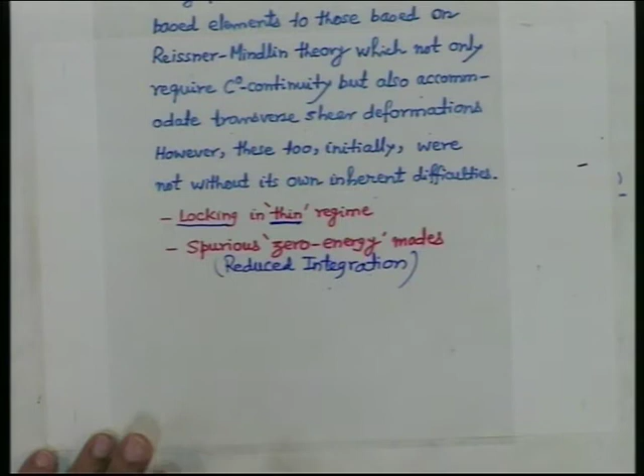I was discussing with you the concepts of locking and spurious modes, philosophically, meaning without giving details. What I was telling you is that if you use a shear deformation theory like the Reissner-Mindlin plate theory, which includes shear deformation, the theory is good for finite element because the formulation becomes C0 continuous. Shape functions are easily derived, simple formulation, plus it also includes shear energy. So it can also be used for thick plates, laminated plates, and so on.

So there are advantages, but when the thickness of the plate, beam, or shell becomes thin, same formulation, only one dimension becomes thin, then what you encounter is a phenomena called locking. What is locking is that the displacements you obtain become very, very small. Very small means not half or a quarter or a tenth, but 1000, 10,000 times less, with the same formulation. So people gave this phenomena the term locking, that your displacements are getting locked. Becoming very small means the flexibility of the plate is simply not there. It is displacement, no displacement.

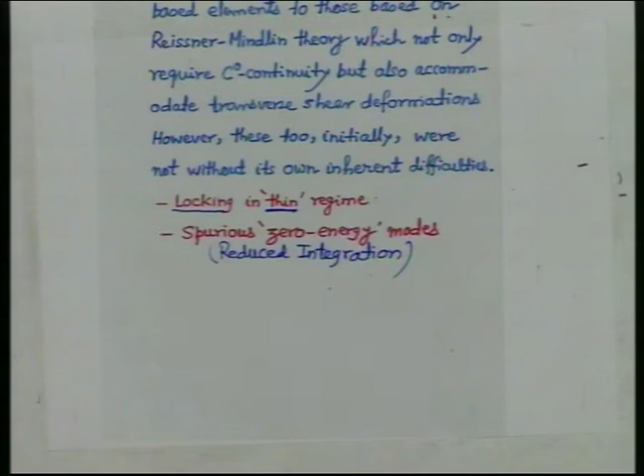So then people said, and it occurred accidentally - this solution that I am telling you, numerical integration - if you were to integrate that integral by a formula which required 3-point integration, then the solution showed locking phenomena. But if you do not integrate by 3-point, but instead integrate by a 2-point formula, which is not correct, which is incorrect, then people found accidentally that the displacement obtained was reasonable.

So they gave the name to this method 'reduced integration method', reduced integration technique. It is a trick, it is not a method. So I will say only technique, and it was not developed, it just occurred accidentally. I will tell you the history, how it occurred.

Okay, so reduced integration started being used for thin plates. Once you have a thin plate, thin shell, thin beam, people started using reduced integration in order to get a reasonable solution. Then they found that sometimes...

...in a particular boundary condition problem - boundary condition means some peculiar boundary. Suppose you have a plate supported only - you must have seen in some parks, there are roofs with only 4 columns, 4 corner supports, a plate supported only on 4 corners, no beam, just a slab. It is a very light structure, only to cover you from shade. So something will be there and there will be 4 columns. Now, after all this, it will deflect.

Then people found what is causing that problem: you are getting more than the necessary zero eigenvalues in the element. By doing reduced integration, what happens is the number of zero eigenvalues increases.

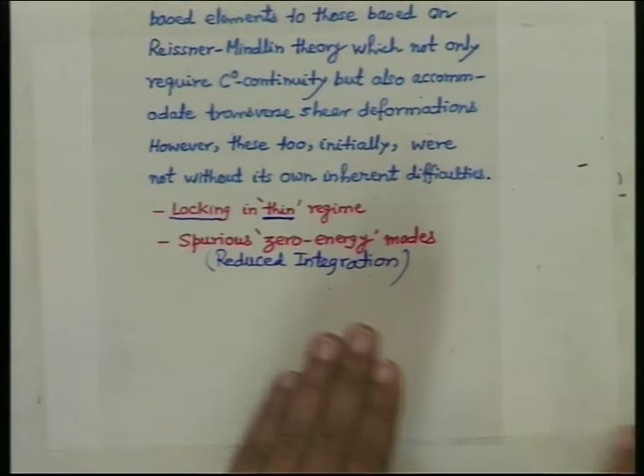The diagnosis was that it is occurring because of extra zero eigenvalues. Zero eigenvalues represent rigid body modes, rigid body motion of the element, because once anything deforms, first it is rigid body motion, then only deformation follows. So rigid body mode has to be there anyway, meaning extra rigid bodies were occurring.

That was found to be the cause for why you were not getting a solution in some particular boundary condition. Anyway, a solution has been obtained even for this, but these are all tricks, not straightforward solution procedures.

So there are many things that finite element methods need. These are the developments that have taken place from 1975 onwards. The first 10 to 12 years was the basic methodology, everything very sound. People started using the method and thought they had solved all the problems, but it is not so. The more you try to improve, the more problems you come across.

So there are two problems that you face with shear deformation theory: one is locking, the other is extra zero energy modes.

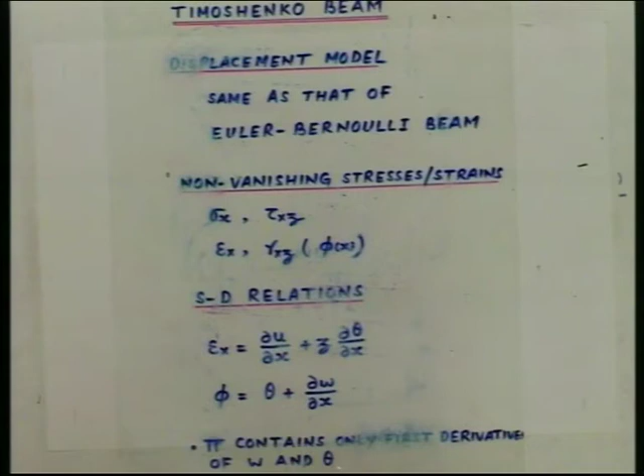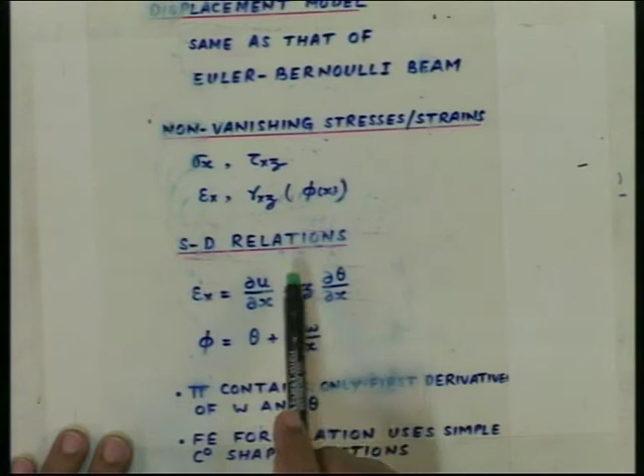I will explain this with reference to Timoshenko beam theory. Timoshenko beam theory is similar to, but the next level beyond, Euler-Bernoulli beam theory, as it includes shear energy. The displacement model is the same as Euler-Bernoulli, and here the non-vanishing stresses and strains are given. Your strain relation, epsilon x, will be this, and the shear strain, gamma xz, which I write as equal to phi, will be given by this.

You should note that these two, the extensional strain and the shear strain, will enter into the expression for your energy, pi. Pi is the strain energy, the total potential energy, and that consists of strain energy. So pi contains this as well.

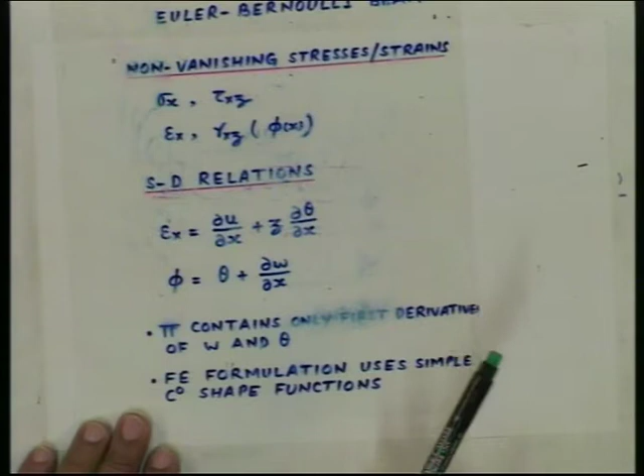A C0 formulation will always have the expression for pi containing only the first derivative of the basic dependent variable, not the second derivative. You will find that the energy expression for Kirchhoff plate, Euler-Bernoulli beam, and Love's theory contains the second derivative. But the theory which contains shear energy will contain only the first derivative. The finite element formulation this requires is only C0.

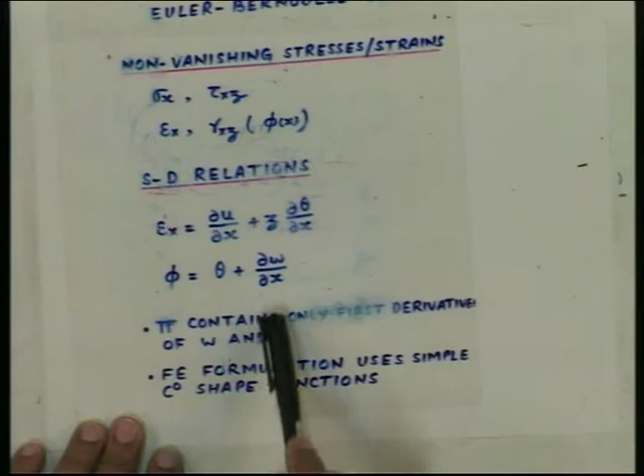So this is another way of looking at it: if your energy expression has only the first derivative of the dependent variable, your formulation will be C0. If the energy expression has the second derivative, what does that mean? In the integral you have a second derivative, so you have to evaluate it. If you have to evaluate the second derivative, one derivative less than the highest derivative occurring in the expression must be continuous. That is why the first derivative dw by dx should be continuous, not just w itself, but also its derivative.

It is always the case that the continuity requirement for integrating a function's second derivative is that up to the first derivative, the function must be continuous. That is why C1 continuity comes in.

What happens in Euler-Bernoulli beam theory is that this transverse shear strain, the same expression I had written, phi equal to theta plus dw by dx, is set equal to zero. If you set this equal to zero, you get theta equal to minus dw by dx, and this causes the occurrence of a second derivative in the potential energy functional pi.

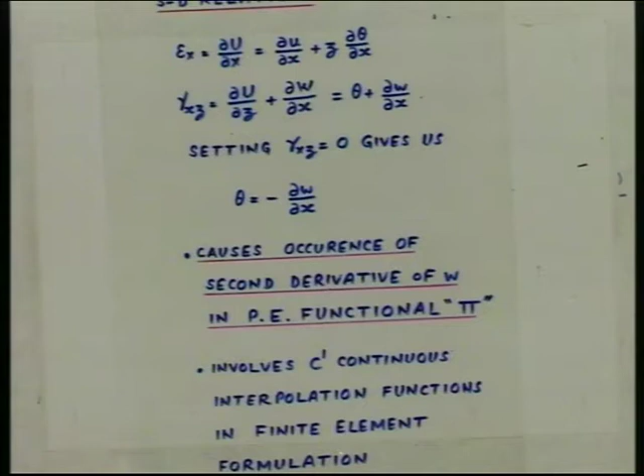What gives you the second derivative in the energy expression is this: you express everything in terms of only w, and w becomes a second derivative. The moment you see any second derivative in an energy expression, you should recognize you will need to use a C1 continuous finite element, meaning continuity of displacement. That means you need continuity of not only w but also its derivative, both must be degrees of freedom. Then only can you have continuity, and such formulation involves a C1 continuous interpolation function in the finite element. I am emphasizing the same thing in different ways.

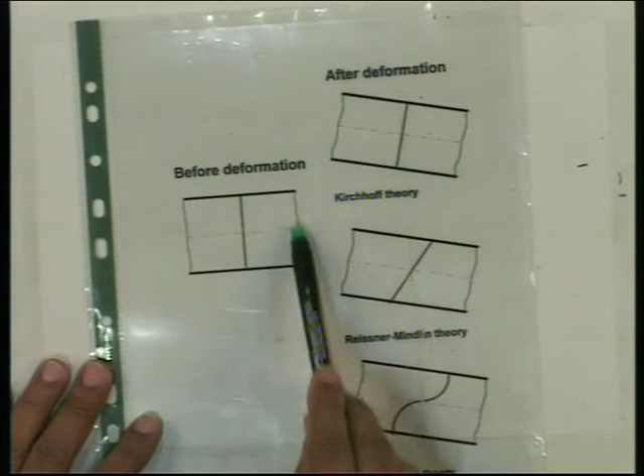What I have been telling you so far is this, in a nutshell, with a simple diagram. If this is the thickness of a beam, a plate or a shell, I have taken a small element. This vertical line is the normal, the transverse normal, and this dotted line is the mid surface, mid line, or neutral axis. There should not be any confusion after seeing this diagram.

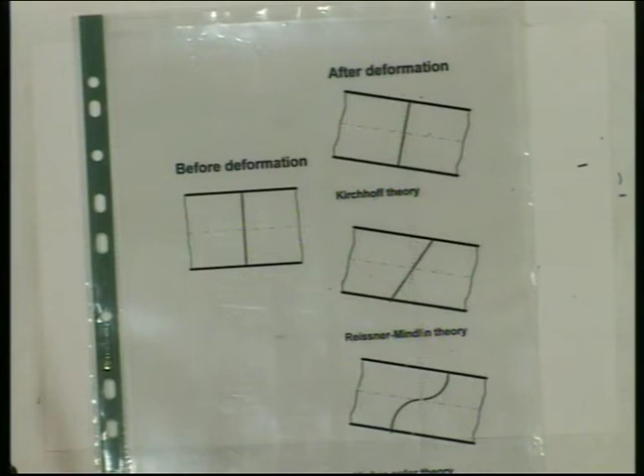This small element after deformation will get deflected, so we have to show this small deflection. It is small deflection, it will not change so much that every angle is different. In Kirchhoff theory, if this line is the neutral axis, after deformation this normal will become like this, and the 90 degree angle between this line and the thickness line will be maintained.

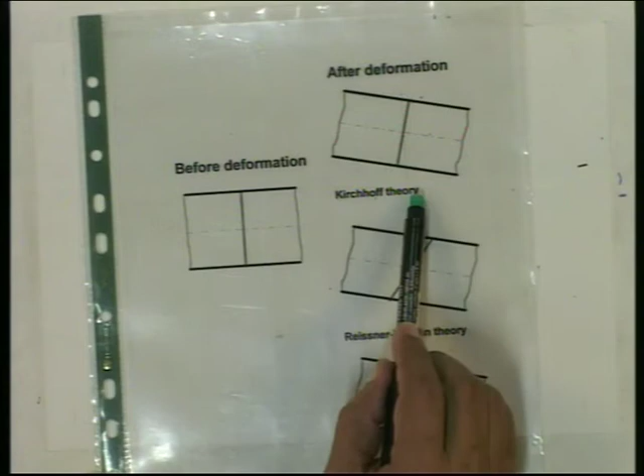That is the Kirchhoff theory, applicable to Euler-Bernoulli beam theory, Kirchhoff plate theory, Poisson-Kirchhoff plate theory, and Love shell theory. This one is exactly the same, no difference.

Now, when you include shear, we are saying that this normal remains straight, but not necessarily normal anymore. So it takes a shape like this, and this shape means you have an additional angle that you are seeing here.

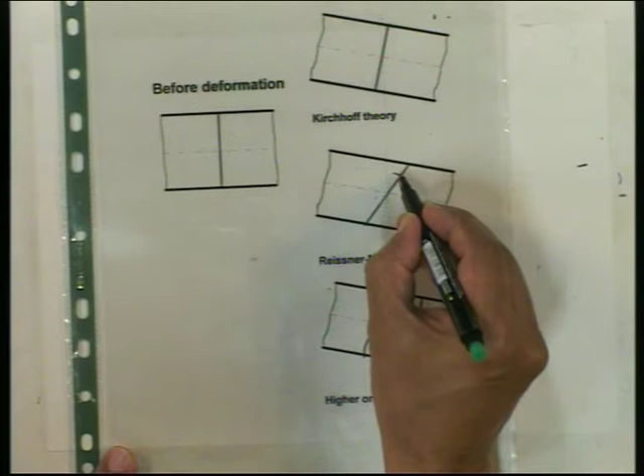What is that additional angle? It is this, because this is the normal, this dotted line, and the additional angle is this, by which the normal rotates. This angle is the shear angle, gamma xz.

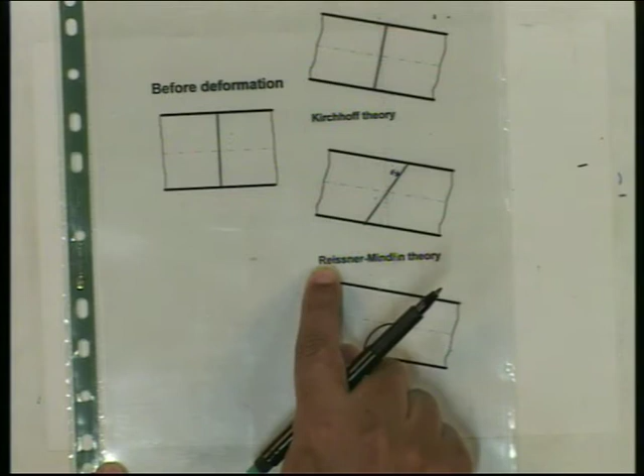Gamma xz is constant throughout the thickness, same, because it is a straight line so it cannot change. It should actually change, but it is not happening in this theory. That is called Timoshenko theory for the beam, Reissner-Mindlin for the plate, and Naghdi for the shell. Exactly similar formulation has been done for all three: Timoshenko for the beam, Reissner-Mindlin for the plate, and Naghdi for the shell.

Then you come to this: we assume that after deformation the normal does not remain straight, but becomes curved. It takes a cubic curve. So deformation of the normal is there, and such a theory which includes deformation of the normal is also called warping of the cross section.

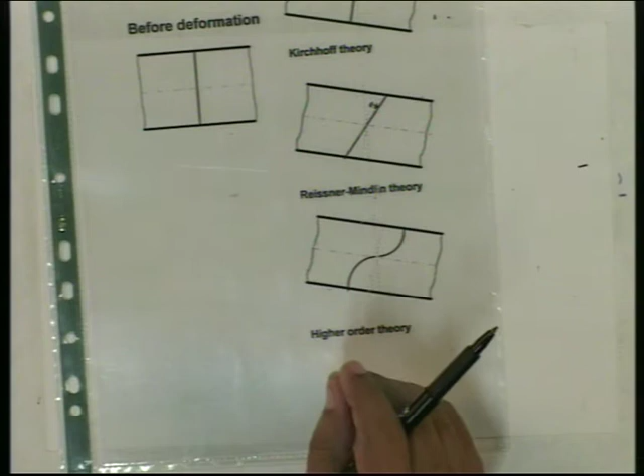Warping, if you have heard the term, what is warped? The cross section gets warped, meaning the cross section of a beam, plate or shell comes out of plane, becomes something like this, it goes out, goes in, out and in. That phenomenon is called warping.

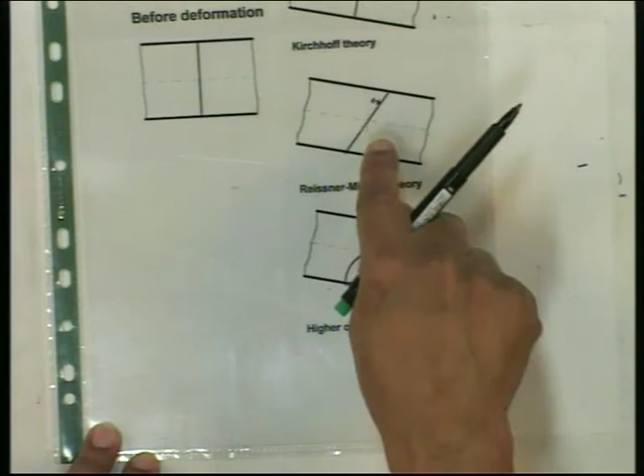But if you take a single line, it will be like this, the normal. Such formulations are higher order, meaning you are taking additional terms which I had explained to you in the plate theory. Nowadays we use this to a great extent for composites, higher order models, because the simpler theories are not enough, they are useless for sandwiches and composites. We have to use something like this minimum.

This diagram all of you must practice and see. This is for a plate. Very clearly I have shown the state of stress that exists in a plate. I think I must have drawn this in class also, for those who took the plate and shell course, but there I was using the blackboard, so I was looking for this diagram which I had made long time back.

It was there in this file, but there are so many files, so it is difficult to search which file, which paper is there, that itself is a big job, you know.

This is at a distance, this line is the mid surface, solid plus two dots, like any center line we draw. This is the mid surface, and the hatched line you are seeing is at a distance z and of thickness dz. So what is the stress acting at a point on this?

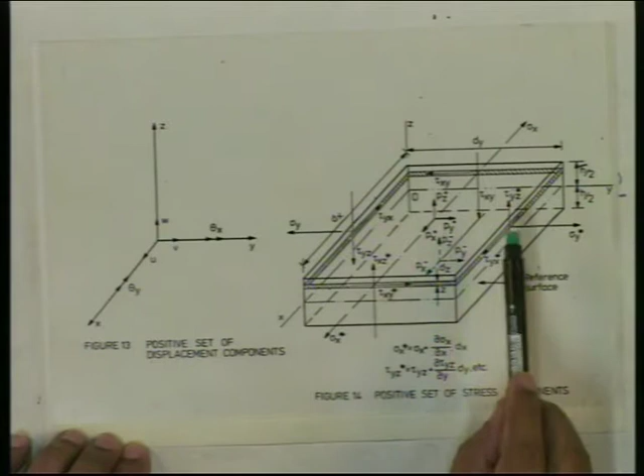You make a small parallelepiped, a 3-dimensional element, and show the stresses on the positive and negative planes. For example, this is my positive x plane, so there will be sigma x, tau xy and tau xz at this point. Similarly, this is my positive y plane, so sigma y, tau yx and tau yz.

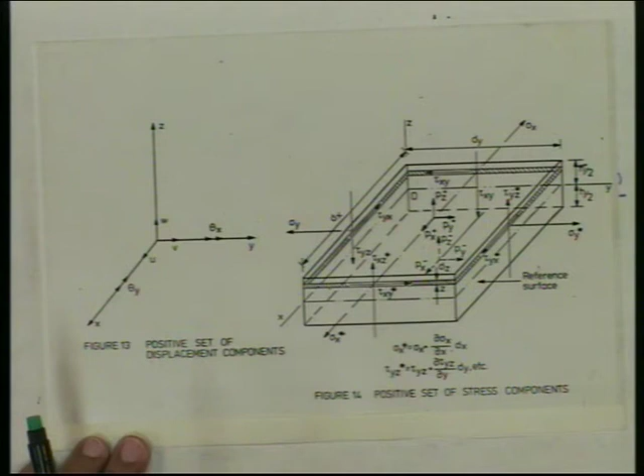Is it okay? Why have I put a star here on this negative plane? I have tried to show that if this element is of finite size, there will be change from here to here. That change means increment, and increment is derivative. Similarly, here there will also be some increment.

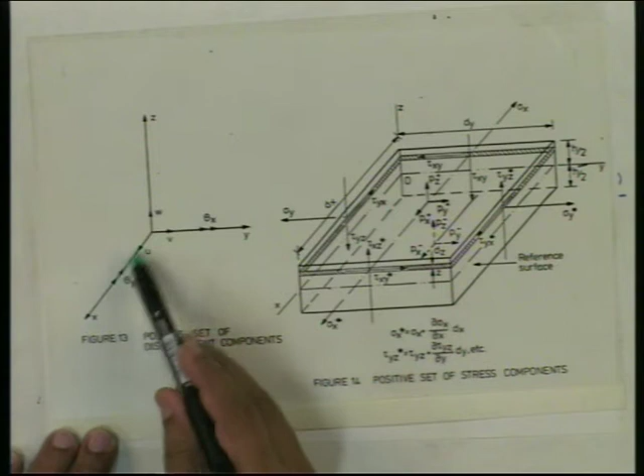So this diagram you should know. You should also know what are your positive directions, positive displacements and positive rotations. These are our positive rotations. Theta y is going inwards along the x direction, theta x is going along the y direction in the positive sense. Then the load is acting on the top surface: Px plus, Py plus, Pz plus.

So like this we have the element of a simple plate. You should know this, but plate theory is a 2-dimensional theory.

So what we do is integrate all these stresses and put the effect of these integrated stresses on the mid surface. In a plate theory, a shell theory, or a beam theory, we do not consider the thickness. This must set in your mind fully. I find even in conferences and meetings, even senior people do not have this concept. They do not understand that a beam means a line.

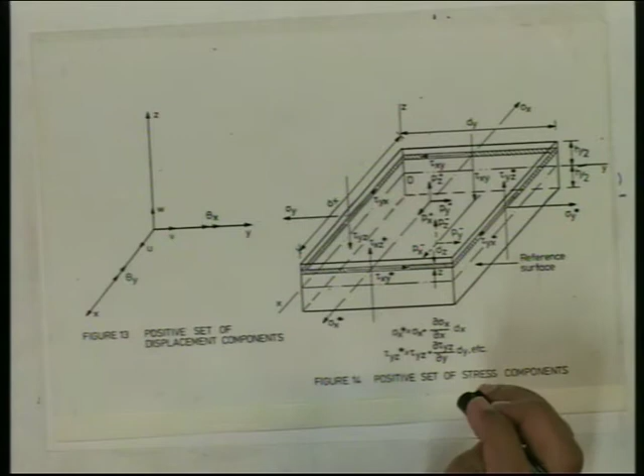We do not have to worry about the thickness of the beam, not h, the depth. In beam theory, it is a one-dimensional theory, so we are studying the behavior of a single line. In plate theory, we are studying the behavior of only the mid surface. In shell theory, again it will be a curved mid surface.

So the mid surface, after you have integrated these stresses, you will get something like this. Although I have shown the thickness here, the effect of these stresses has been put only on the mid surface. These are all integrated values of stresses. Integral of sigma x dz is Nx.

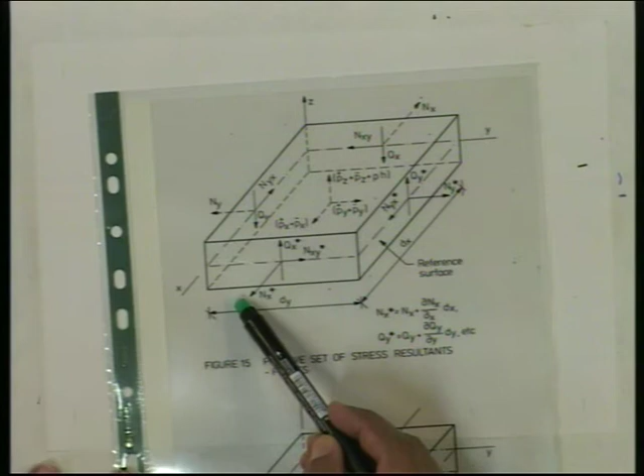Integral of sigma x dz is Nx. Qy, the integral of tau yz dz from here to here, is Qy. It is like this, and they are all put only on the mid surface. These are all integrated values, so any plate theory will include only these forces.

Similarly, you also get moments. So moments will also act on the mid plane in a plate theory. I have shown here the positive moments, and here the positive forces. So this also, please practice.

Now, how do you start the formulation? First of all, you must have some theoretical background about plate theory. You cannot study plate finite elements without knowing plate theory. So read some book for the basic idea about plate theory, the first chapter.

So in a plate, what happens? Kinematics, as you know, means deformation. What is the kinematic relation? Now, those of you who have been following my other lectures, I have made a slight change for a simple reason. The displacement within the plate at any point P is given by u, v, w, which are functions of x, y, z.

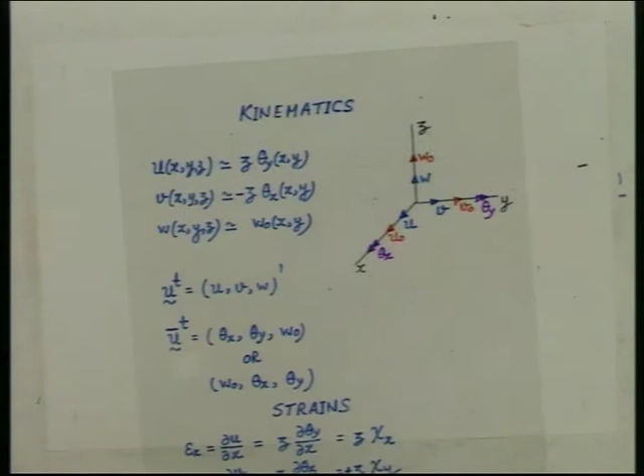It is just like this, you see. So the displacement at any point P is given by u, v, w.

U v w, u at any point inside the plate. This is not a blackboard.

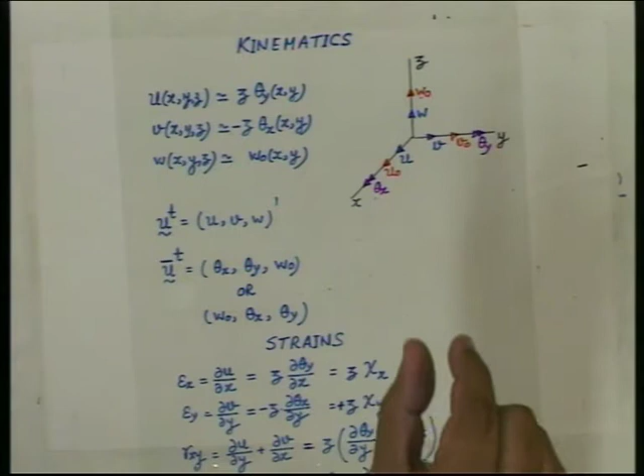At any point P inside the plate, u v w can be written as u transpose, since u vector is normally written vertically as a column u, v, w. To make it a row, I put a transpose here, just to save space, nothing else. Otherwise it would take 3 lines, now it takes only 1 line. So it is a concise way of writing, nothing else.

Similarly, the displacement of P naught, U bar, is the displacement of P naught. What is P naught? What is the difference between P and P naught? P naught is on the mid surface. P naught corresponds to where the normal cuts the middle surface.

Displacement of P naught is given by 3 quantities: theta x, theta y, and W naught. Or you write it as W naught, theta x, theta y. I think this one is more convenient, since we always write displacement first, then rotation. Some books write it the other way, but I prefer W naught, theta x, theta y. So displacement of the mid surface can be completely defined by knowing these 3 quantities. If you know these 3 quantities, you can find the displacement of any point within.

So having established this, the next step in finite element is to first establish your displacement field, then find out the strain. There is no finite element so far, this is just the basic theory of plates. Then you find out the strains.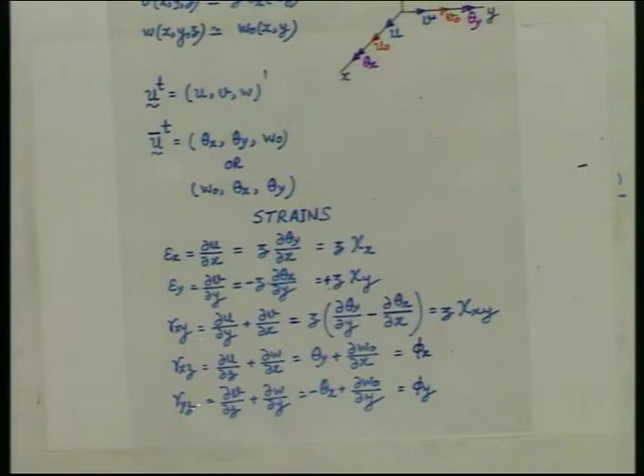Strains are always derivatives of displacement, as in the theory of elasticity, strain displacement relations. There are 6 strain displacement relations, but I have written only 5 here. Why only 5, not 6? Because epsilon z is 0 for a plate, we assume the thickness does not change, so there is no use writing that one. That is why only 5 are written.

So epsilon x, du by dx, will be z times d theta y by dx, and this quantity we call kappa x - curvature, the change in curvature. Initial curvature was 0 for the plate, after deformation it becomes this. So change in curvature is from kappa 0 to this. Rate of change of rotation is curvature, so this is kappa x.

Similarly, epsilon y equals z times kappa y. Then there's the twisting curvature. In-plane shear strain will be z times kappa xy, so this quantity is kappa xy.

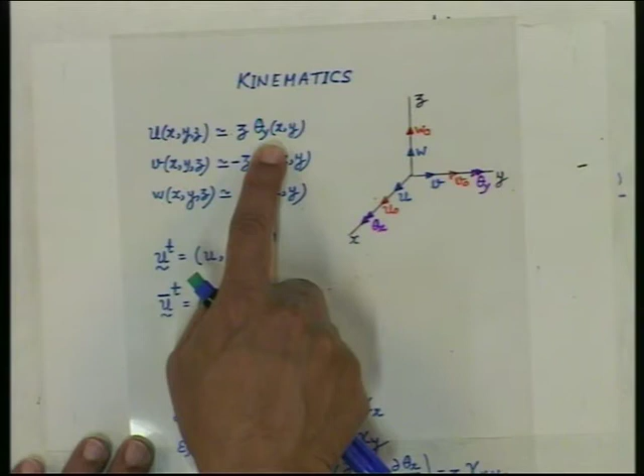Now in the computation, there may be plus minus differences from what you learnt in plate theory, because of a change in sign convention I have made here. Where you'd put theta x, we have theta y, and theta y equals minus theta x. If you make that change, everything else follows. By doing this, I have made all these rotations positive, that's all, nothing else.

So this is one way of looking at it. Then gamma xz is du by dz plus dw by dx, giving this term. Since it is constant, it does not vary with z - it's a constant shear angle.

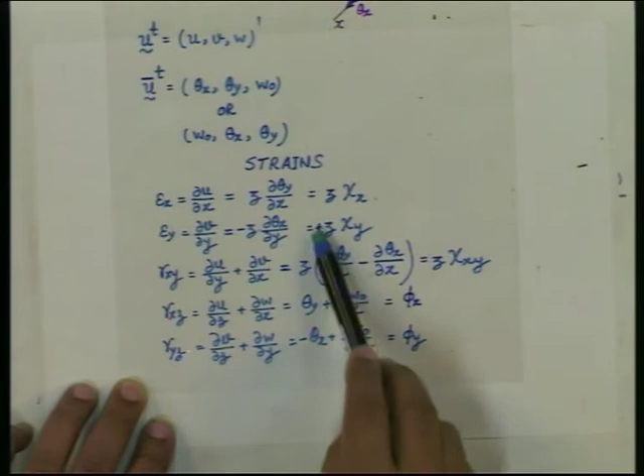Let us call that shear angle phi x. Phi x is the shear angle in the xz plane, phi y is the shear angle in the yz plane. So you have the strain displacement relations: strains at any point P in terms of the curvature of the mid surface and shear angles of the mid surface. This relation follows directly from the displacement field.

Then, yes, then you have to have the expression for mid surface strains. What happened, not coming? Oh, coming, okay, good, I think display is okay.

So this is mid surface strains. What are mid surface strains? There is kappa x, kappa y, kappa xy, and there is phi x and phi y.

So this is how I have just put it: kappa x, kappa y, and kappa xy in one bracket, and this shear in another bracket. I am calling this part B, and this part S.

And there is a bar quantity you must be seeing here, above the strain, strain bar. Strain bar refers to all the quantities that you find.

Some people are simply sleeping. They do not want to relax, what is the use of listening, let us relax.

So, bar quantity refers to mid surface, and quantity without bar means point P. Quantity with bar means we are talking of mid surface, P naught. So all these bar means strains of the mid surface.

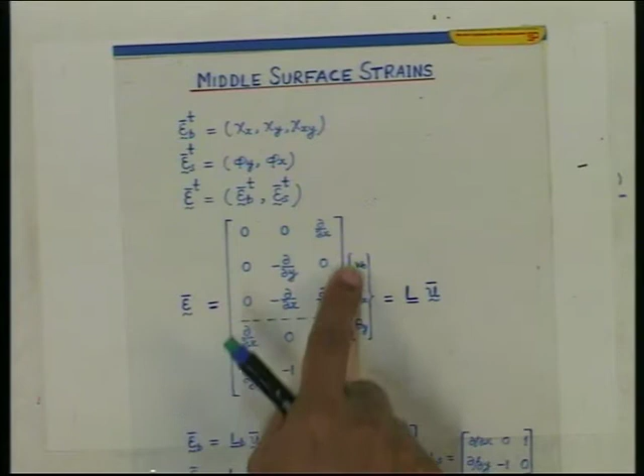And then you simply have to organize your strains. Strain bar can be written in terms of these basic displacements, W naught, theta x, theta y. So there will be L times U bar. What is U? U is U, V, W. And U bar means this. We are calling this vector as U bar.

I think I must have given you this in the earlier one, yes, right in the beginning I made it very clear. U is this and U bar is this, so there should not be any confusion. Mid surface is U bar, because now everything will be only in terms of mid surface in plate theory. So this strain, mid surface strain, is equal to L times U bar.

Now here I have partitioned this matrix. There is some reason. This total L matrix has been partitioned into two parts. There is a reason for it, and it is not given in most books. The reason is most books do not go into details about reduced integration, locking, zero energy mode, and how to develop effective elements. So they just give you the procedure, but that procedure will fail when you have thin regime, when you have a thin plate, it will not work.

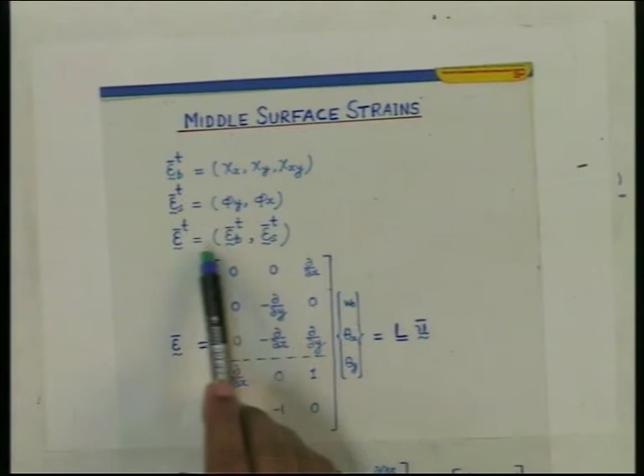So there is a reason for partitioning. This top part I am calling LB, and the bottom part, because of shear, is LS. Here also, total strain consists of epsilon B, three terms, and epsilon S, so there are five quantities in the total strain. So we can also write down the bending strain of mid surface and the shear strain of mid surface as LB times U bar and LS times U bar, where U means U bar. So this expression is good.

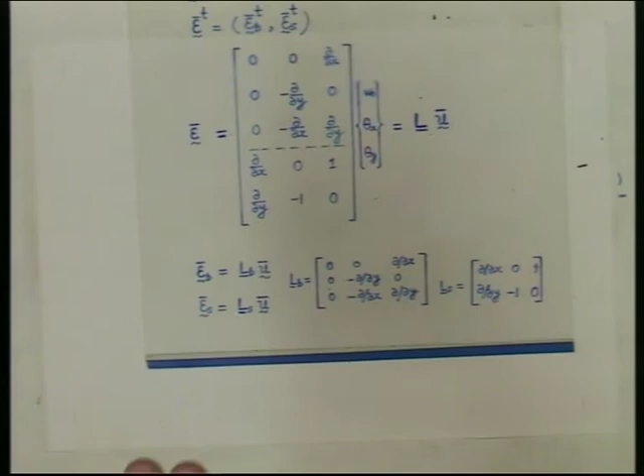And sometimes, see, this is preparation before doing the finite element. We have not talked about the type of element, whether you are using rectangular, quadrilateral, or triangular element. No talk, this is the basic preparation. Every finite element work requires some basic preparation, initial preparation. So that you have to do. So you have to partition this like this.

From Punjab, there is a story attached to this Butalia. He is from Chandigarh, so he did his masters. Now even, I am saying, even in masters he was so motivated. In 18 months, in those days only 6 months of thesis work was there, in 18 months he produced work of a quality worth publishing in a good journal, and he published before leaving this place. Okay, so this is called motivation of a student, you know.

Coming from Punjab, very carefree, you know, people are carefree, not very, we always feel that people from South India and Bengal, they are more motivated. But this man was from Punjab, Chandigarh. So after doing his masters, he applied to some universities for PhD. Of course he took my recommendation, etc, so that is a different matter.

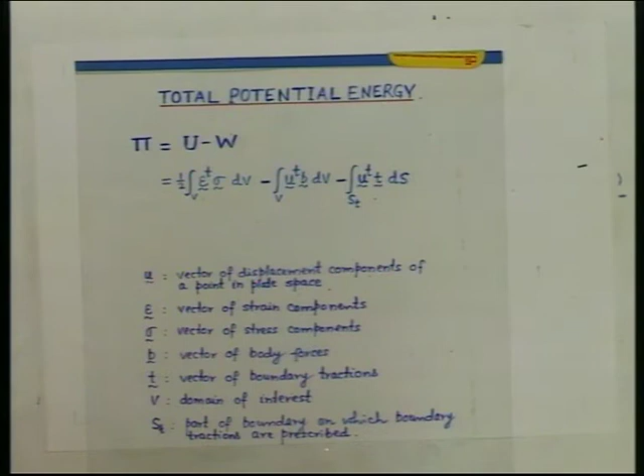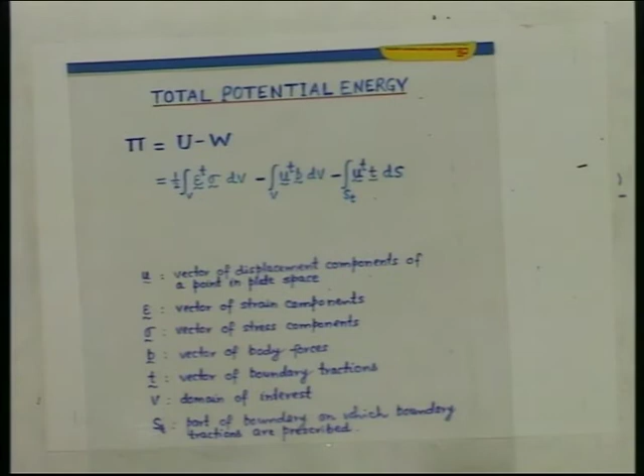Having defined your strains, you find out the potential energy, in the usual manner. This is strain energy minus work done by forces - body forces, traction forces, edge forces. I will not spend time on this, because otherwise time is always at a premium.

This is seminar mode now, seminar mode is flash - you get everything only in a flash. So then you find out the strain energy. There are two types of strain energy, one is flexure, the other is shear. Flexure and shear, we can find out in the usual manner.

Flexure consists of epsilon, sigma x, sigma y, tau xy, and the corresponding strains, and you can get this strain energy in terms of the mid surface strain and mid surface forces. So this is the final expression.

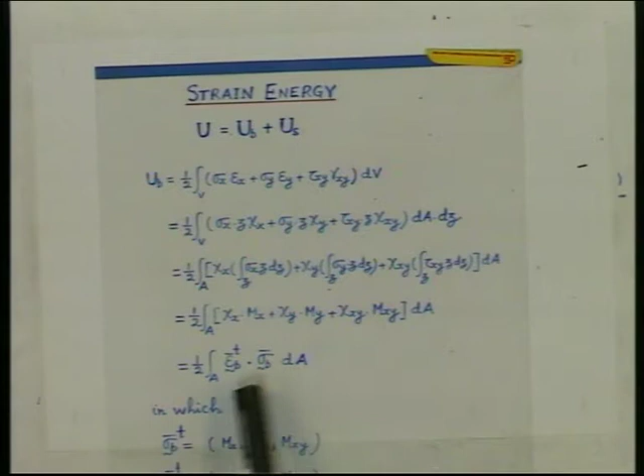Incidentally, this is recorded, so it will be available to you, this video - that is one good thing about video.

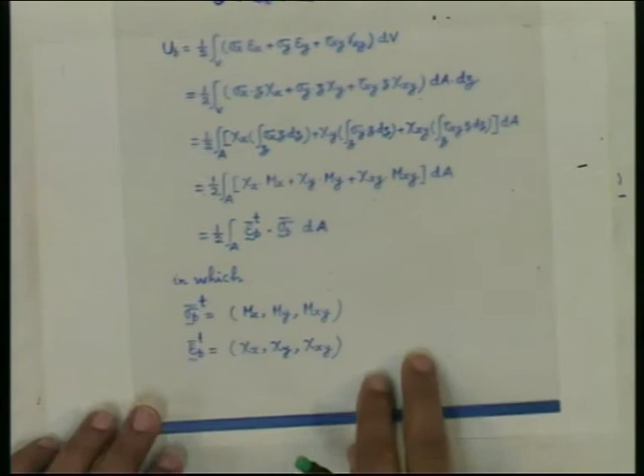And here I have written very clearly that epsilon b is this, and these three kappas, and sigma b bar is this: mx, my, mxy. So this is bending, meaning bending I am separating from shear. I am splitting the total strain energy into bending and shear, there is a reason for it.

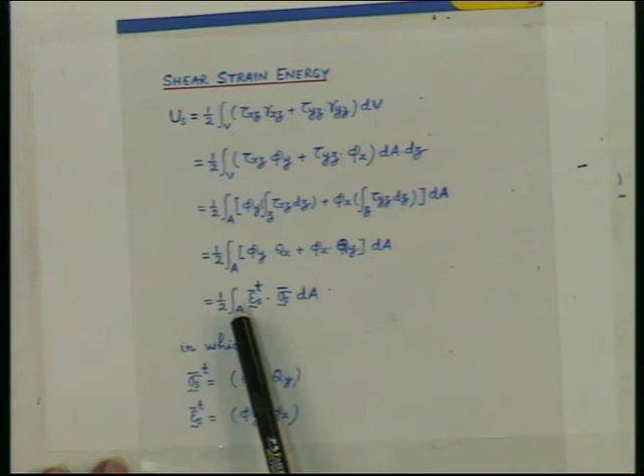Then I can find out the shear strain energy, second part, US. US consists of tau xz doing work on gamma xz, tau yz doing work on gamma yz, and if you fill up all the quantities, you get the two-dimensional expression. This is in area - you start with volume and come here over area. Last expression only is in area, area meaning mid surface area. So it is epsilon s and sigma s bar, and these quantities are Qx, Qy, phi y, phi x.

By the way, this is phi y, phi x because of that, so that one should be there. Then you have the total strain energy like this, whatever we have derived.

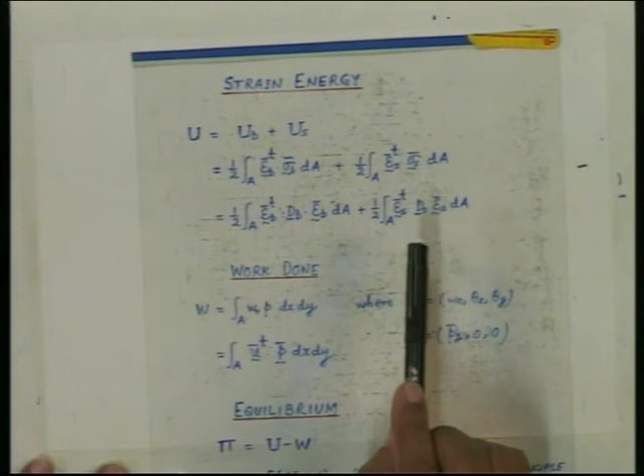Now here, of course, in those days I was using D instead of E. So this D means your elasticity matrix for plate. Plate means relationship between - dB means relationship between mx, my, mxy and kappa x, kappa y, kappa xy. ds means relationship between qx and qy and phi x and phi y. Phi x, phi y are shear angles. So this one, we can write like this.

See, strain energy is always a quadratic function. See, there is a strain transpose, again dB strain, so it is a quadratic function.

Then one can find out the work done, then equilibrium - pi equals u minus w - and then minimize this, take the first variation of this, that is delta u minus delta w, principle of minimum potential energy. You can also interpret this as a principle of virtual work, virtual work principle, or virtual displacement principle. There are so many ways of expressing the same thing.

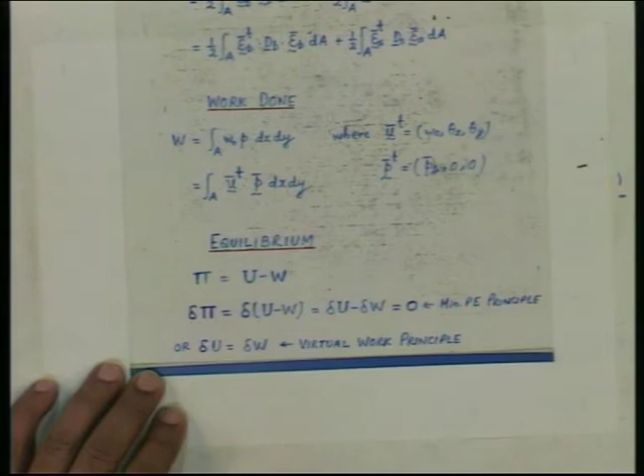So this I have been telling - all these things are needed, and these constitutive relations, I think all these quantities have been defined.

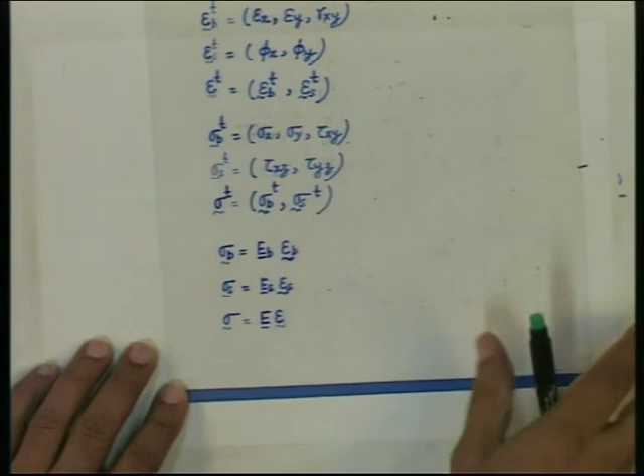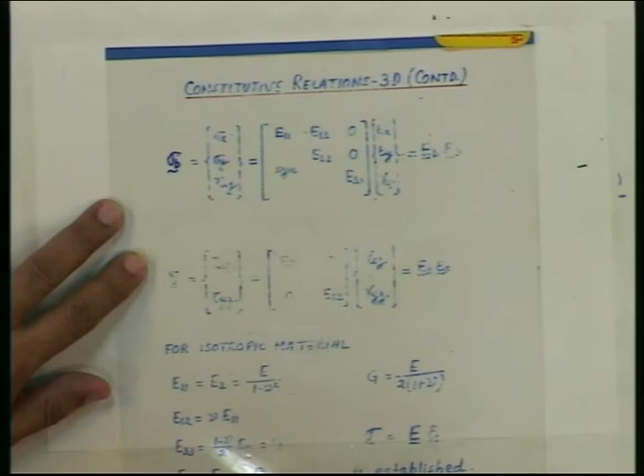You know, this one, sigma and this and that, everything is defined. Now, having done this preparation, this looks something like this. This is not very good, I think I have to rewrite. I don't know why. Let me see whether it is improving. Yes, so it is.

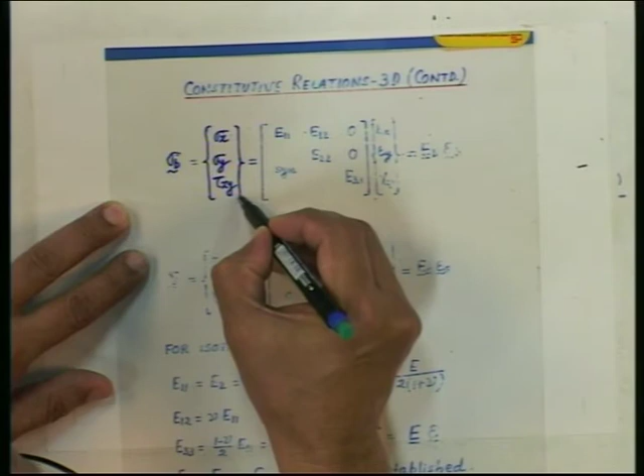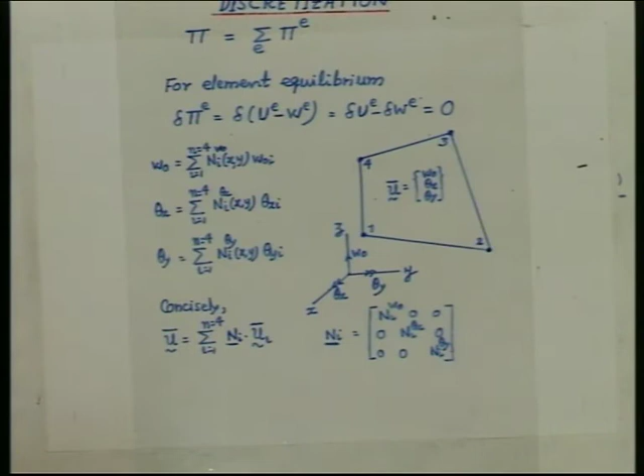So, anyway, we can do this. You can establish your constitutive relation. Basic thing is this. Now, then come to your element. Here we will say element. After doing so much work, then comes element.

Why we are able to assemble the element property is because the strain energy, the total potential energy, can be summed up. Element potential energy can be summed up to find out total potential energy. So, we can work only on the element and then do the assembly.

So, here I have taken a quadrilateral element which can be mapped into a 2 by 2 unit xi eta element. So general quadrilateral elements, each one is having 3 degrees of freedom, W naught, theta x, theta y. So, 3 into 4, 12 degrees of freedom total, it is possible to write like this.

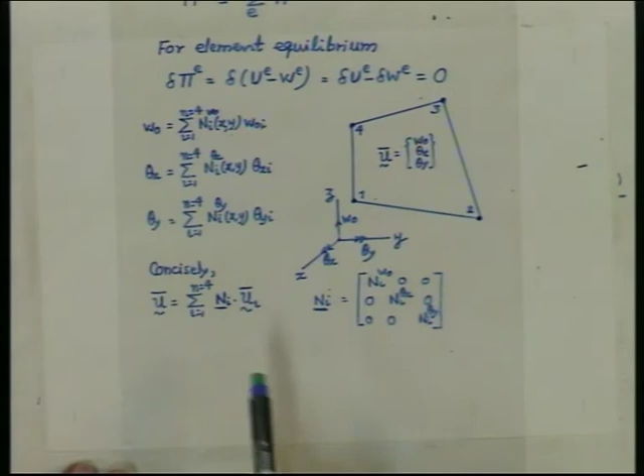Now, here see there is no relationship between W and theta x and theta y, while in a Kirchhoff plate theory only W is independent. Next one we will be writing dW by dx and dW by dy. So, they are all related; here there is no relationship, okay, they are all independent. So, this is what is the difference between the two, and we can do this shape function. We can now, I will quickly, these things these are all mechanical.

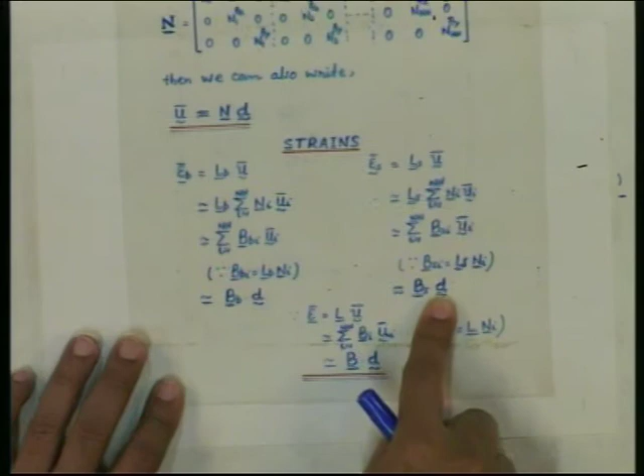We can find out the B matrix, and again B matrix can be split into two parts. Total shape function matrix, N matrix total, then B matrix means BB and BS, shear and bending. So, like this we can split this, and it looks something like this.

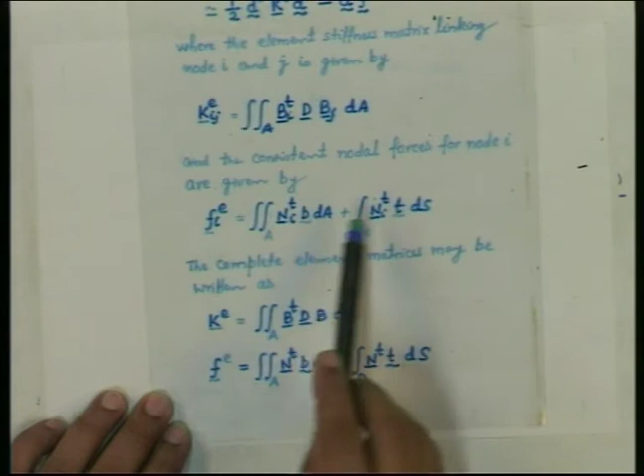And then we can find out our stiffness properties like this. Stiffness property and the load vector property, stiffness and load vector can be found out like this. But for finding out you have to do hard work. This is only to show.

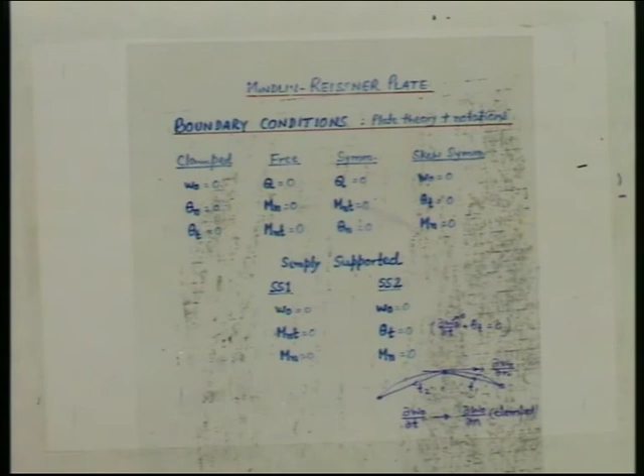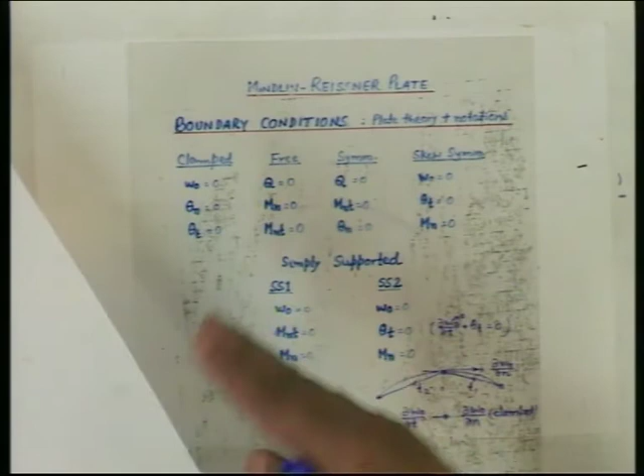The boundary conditions that we normally encounter in a Reissner-Mindlin plate formulation. One is clamped. Wherever there is a clamp, all these 3 degrees of freedom will become 0: normal rotation and tangential rotation. See, I have not written here theta x, theta y. Normal means normal and tangential to the edge. Edge can be anything, edge need not be in x direction. So normal is this and t is this, okay, normal and tangential. If it is free, q, mn, mnt, but then these are not your degrees of freedom.

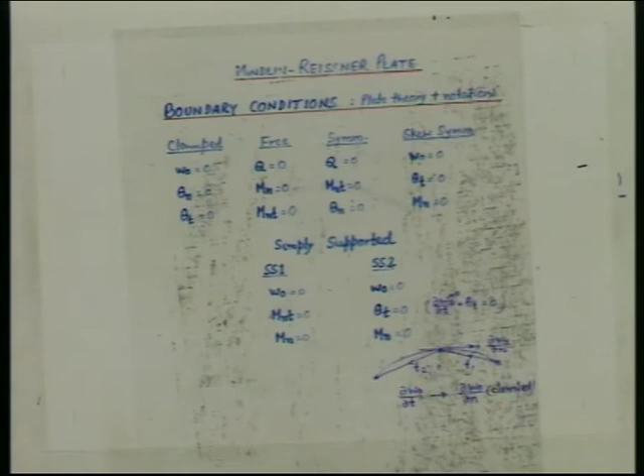Q is not your degree of freedom. Your degrees of freedom only this. At every node you have only this quantity as your exposed quantity, degrees of freedom in the finite element formulation, because we are using displacement based finite element. Only nodal degrees of freedom, nodal displacements are DOFs, not forces. Forces are inside, they are not exposed at the nodes.

So, how will you meet this condition, free condition? I have no way of meeting it. If this edge is free, this is a plate and this edge is free, so many nodes are coming here, what should I put as boundary condition? I can't put anything, just leave it as it is. So, wherever free condition is there, you simply do not put anything.

Actually, you should put this moment, normal moment 0, this 0, shear force 0. But then where to put? Because at a node I know only displacement. So, just leave it. Any force, you cannot prescribe any force quantity in displacement finite element formulation. All your programs that you use, free boundary condition cannot be prescribed. Understand? So, what do you do?

You will always get some error near the free condition, because you are not giving the boundary conditions right. So, there will always be some error in your solution near the free edge. Okay, so do not give anything.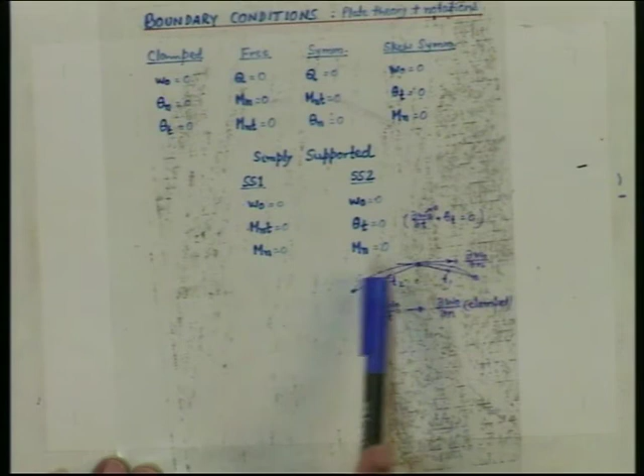Simply supported, there can be two types, I think I have discussed this in the other class, but anyway, these are the two types of simply supported boundary condition that we can think of if it is only flexure. And of course, I have taken also symmetry boundary condition and skew symmetry boundary condition that you can use. But the basic thing that I want to discuss is this before I...

Huh? You have a class, yes, last one. I also want to.

Sorry, I will show you this. Anyway, let it be recorded. Doesn't matter, they will say how poor was the teacher. So anyway, so this is...

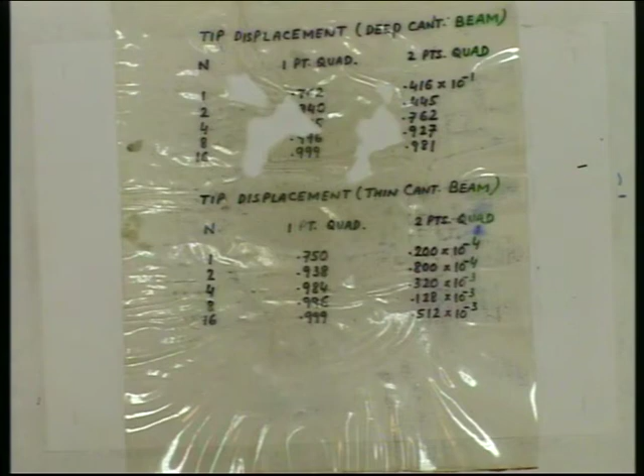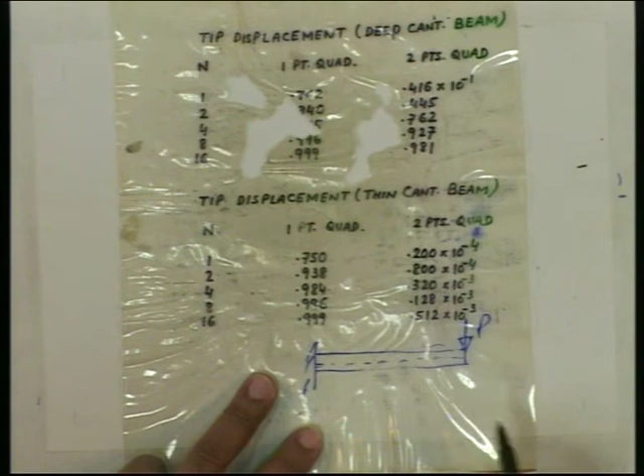This is a result I have obtained for a cantilever beam, with a tip load P. This deflects, and you all know the deflection is PL cube by 3EI, if L is the length. That much you know for a cantilever beam. For a slender, thin Euler-Bernoulli beam, it is PL cube by 3EI, not for a thick beam. Thick beam you do not know, you have solved only thin beam.

So for this problem, this is a thin cantilever beam. Thin means I have taken thickness 1 by 1000. Length is 1000, thickness is 1, very thin.

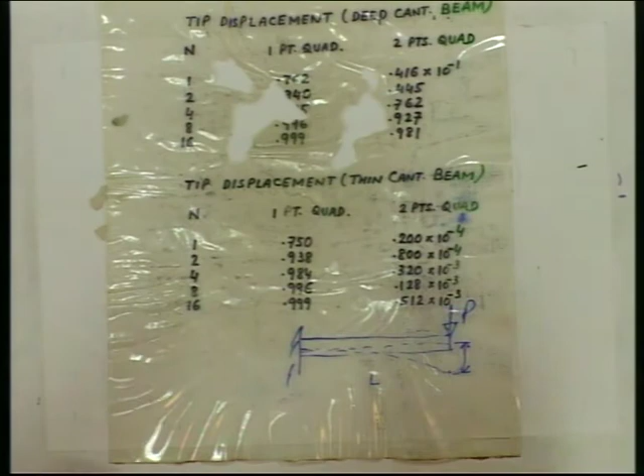See, this is the kind of result. With one element, you are getting 0.2 into 10 to the power of minus 4, a single element solution for the total length - that will be a very bad solution. Two element, some improvement, 0.8 into 10 to the power of minus 4. 4 element, 0.32 into 10 to the power of minus 3. 8 element, 0.128 into 10 to the power of minus 3 displacement. And 16 element, 0.512 into 10 to the power of minus 3.

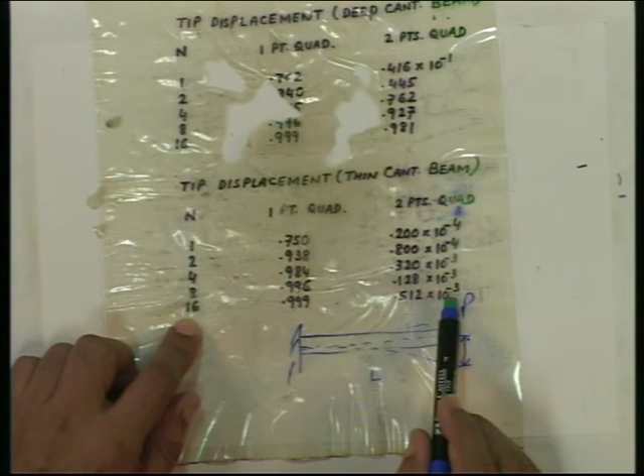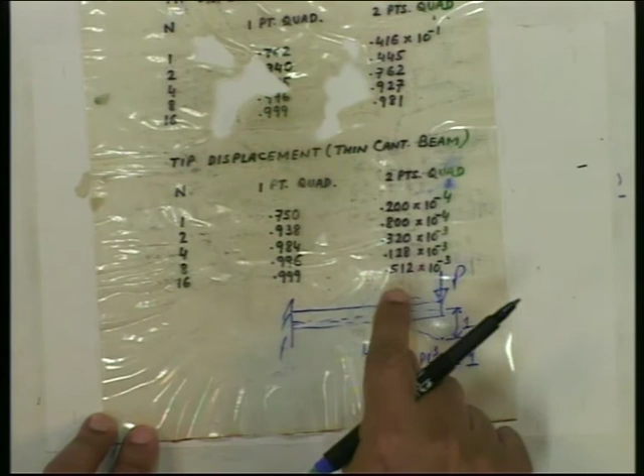The program has no error, but this is the kind of result you get. Even with 16 elements, 2-noded elements along the length, you are getting such a stiff result. How much was my expected result? 1 - I have non-dimensionalized my displacement, expecting 1. PL cube by 3EI has been set equal to 1, unity, non-dimensional. Now you can see, even with 16 elements it became only 10 to the power of minus 3, minus 2. So very poor. It is improving, no doubt, but what is the order? So this is called locking.

This has been done with 2-point quadrature, exact integration, exact stiffness matrix evaluated exactly. I got this very bad result, and people were not understanding this phenomena, so they just said, oh forget it, I cannot get it.

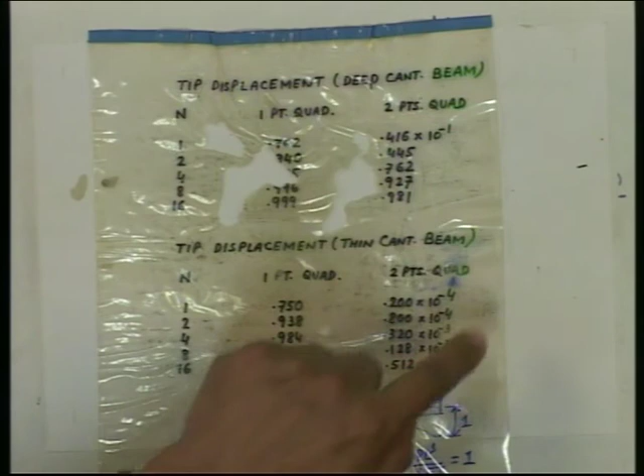So this was the status with everything exact. Now then we did approximate - the same program with 1-point quadrature.

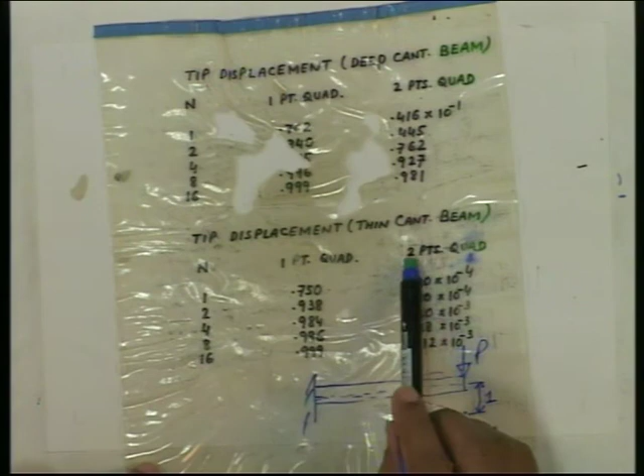The exact integration required 2 Gauss points. Now I did only 1 point, the center - at 0,0 with a weight that comes to 2 times something.

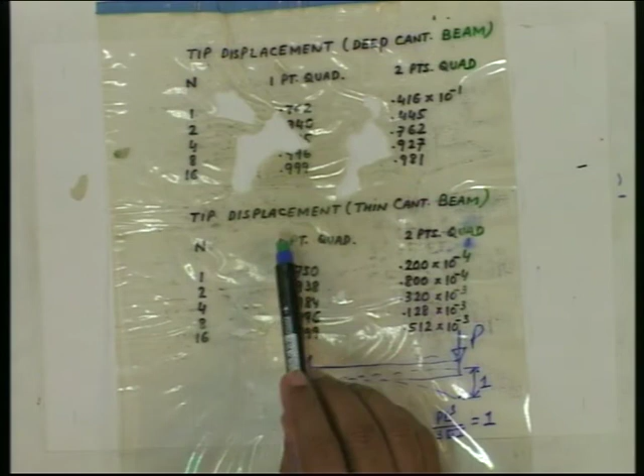Now the results were like this: you can see 0.999. Of course you will be very happy - oh, I have got the result! Same program, only now you are not integrating the stiffness matrix correctly, but approximately, and you got with one element 0.75, two element 0.93 - all those 10 to the power of minus factors have disappeared - and with 8 elements 0.996, convergence is good, converging to the true solution. So this is called reduced integration - I have reduced the order of integration and this is giving me the result.

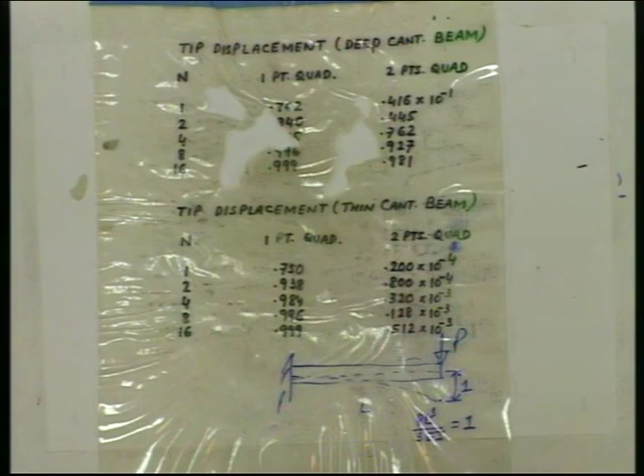Let me tell you the last story: these kinds of solutions made it apparent that we should use a shear deformation theory. There is a person called Ahmad, in Bangladesh - he was a PhD student at University of Wales in Swansea, Ahmad.

He is a professor in Dhaka University. He had gone there under Commonwealth to do PhD, and he was given a topic to develop shell element and plate element for his PhD.

This was around 1970, 69-70. Zienkiewicz and Bruce Irons were his supervisors, two persons, and the student's name was Ahmad.

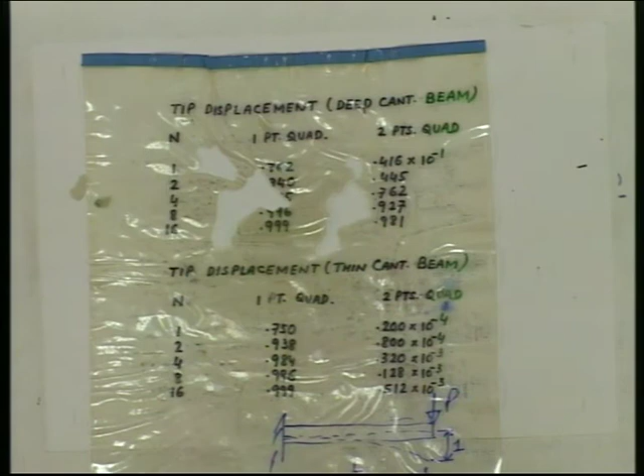Ahmad did everything and found that as long as his beam, plate or shell was thick, he was getting good results, no problem. The moment he made it thin - plate means thin, otherwise it's 3-dimensional - he was solving a 2-dimensional problem, and there was no answer. So he did not tell this phenomenon to his supervisors, he kept it to himself.

Some students always hide things, there is some peculiar phenomenon, but that should have been told. You should always discuss, sir, this is the same program, only one data I am changing - thickness I am reducing, and my solutions are becoming like this. He should have told his supervisor, but he did not say.

But somehow he managed to only do thick beam, thick plate and thick shell problems using this formulation and got his PhD. He came back, became a professor, and again became an MP of Bangladesh. He entered politics also.

So he was a member of parliament, and then he must have retired and is relaxing now. But later on, his program was given to some other student - this is what happens in a university setup, you have developed something and it gets passed on.

That fellow reported the matter to Zienkiewicz, saying sir, I am not getting results. Zienkiewicz said, oh no, this was done by Ahmad, why are you not getting results? So Ahmad was asked - they wrote to Ahmad, what is this matter, this boy is facing problems. Ahmad said, sir, but I was getting good results for thick.